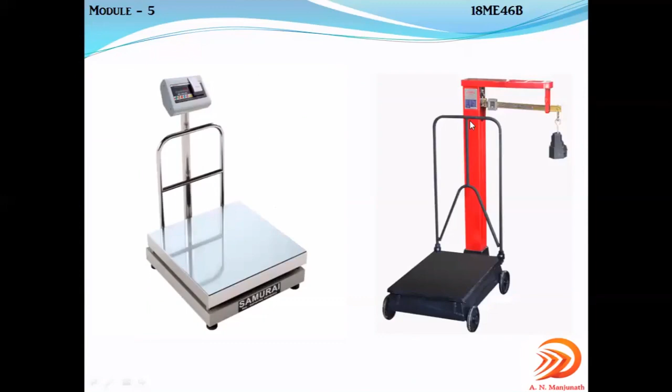Any idea about this platform balance? You have seen these things in grocery stores or shops where they weigh rice packets, 50 kg, 1 quintal packets, on this platform balance. This is what platform balance is, which you might have observed in the grocery stores. This is the digital one.

This is the platform on which the heavy weights or larger weight will be kept, and it will be shown. The earlier one, for the heavy weights, this will be the platform on which the weight will be kept. And this is the WS, shown in the figure, weight of the pan, weight of the poise.

Considering this as the platform balance, that image is given with respect to this. This is a digital one. This will be the more conventional one, where the mass will be kept over here. So this is the platform balance we are discussing now in this image. The resemblance will be there. This is the platform, and it can be moved, as shown here.

This platform balance or multiple lever system, when measurement of large weights are involved, this multiple lever system or platform system will be used.

A larger weight, represented by W, is measured in terms of two smaller weights. This large weight kept on the balance will be measured in terms of two smaller weights: one is WP, weight of the poise, and another is WS, weight of the pan. So the weight of this object, the larger weight, can be measured in terms of these two weights, weight of poise and weight of pan.

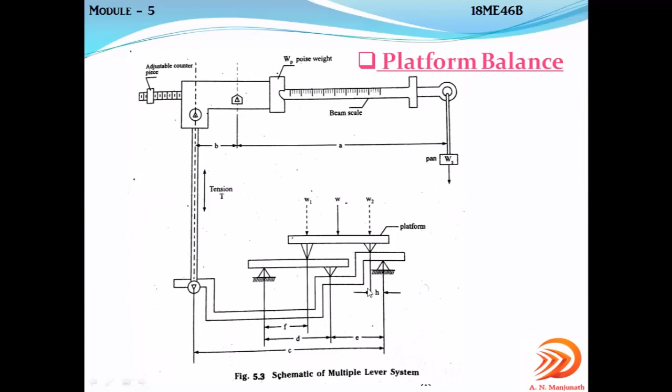With respect to the weight of the pan, Ws, this entire system is in the balance position. That is the assumption. With respect to this assumption, you can observe here, this is the tension. From this distance to this knife edge, this is C, this is D, E, F, multiple lever system. So this is the image we are discussing now.

The same image, multiple lever system. This multiple lever system, the same image I have taken over here. So for this we get the equation.

You can observe here, after this assumption that the W weight is being replaced by W1 and W2, and also this weight of the poise is at the zero. The unknown weight W is being applied. So entirely the balance, centrally, it is being balanced by the weight of the pan, Ws.

That is the assumption. Based on this assumption, you can observe here T into B, this is the tension. T into B, this distance with respect to this fulcrum, will be equal to Ws, the weight of the pan, into A, this arm distance. T into B is equal to Ws into A. That will be called equation 1.

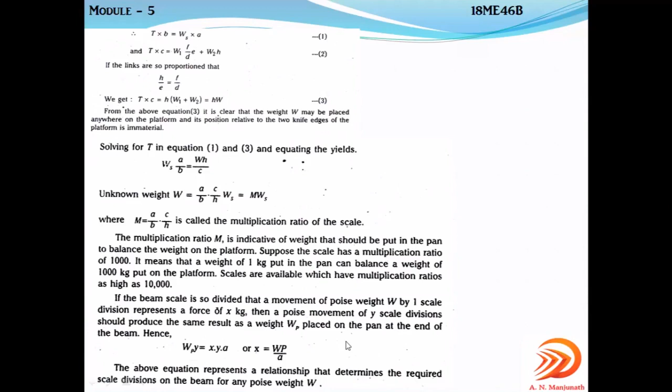This equation represents a relation that determines the required scale division on the beam for any poise weight W. For any poise weight W, this equation represents the relation which determines the required scale division on the beam. So this is what the platform balance is about.

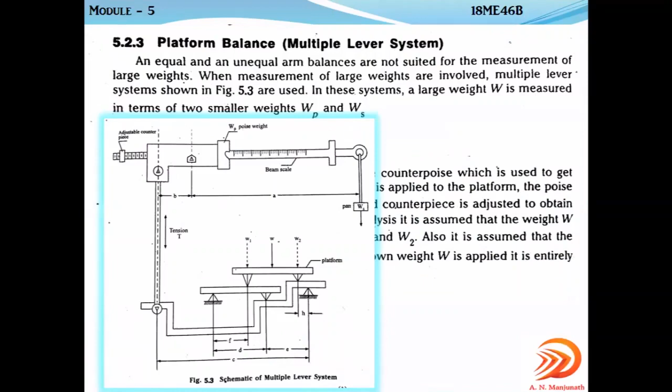Depending on the multiplication ratio, whether it is 1000 or 10,000, it will determine how much weight can be put into this W, S, which is weight of the pan. So basically there will be a pan here on which the weight will be added, so that the weight which is put, the larger weight which is put on the platform, will get balanced.

Whenever it gets balanced, then only you are able to get the reading, you are able to do the measurement. Similarly, like the analytical balance, whenever the pointer shows 0, when it gets balanced, then only you get the reading. Similarly here, whenever it gets balanced with respect to this smaller weight which is added in this WS weight of the pan, we get balanced and get the reading.

So this is another direct method of measuring the unknown forces. Unknown force means the W which is kept on the platform by using the gravitational force of standard mass. So it is also called a multiple lever system.

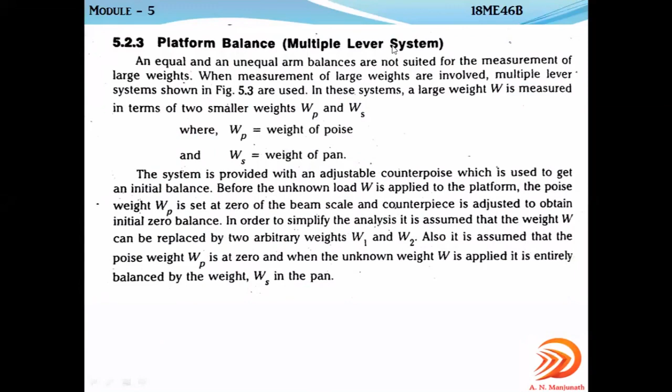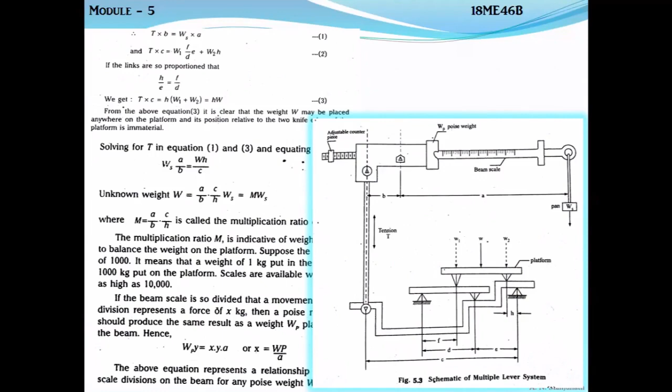So this is about the third one, direct method of measuring the unknown forces. So next topic will be the indirect method. Till now what we discussed is the direct method of measuring the unknown forces. Next will be the indirect method of measuring the unknown forces.

So this is what the indirect method is. Indirect method means it involves the measurement of the effect of the force on a body. Indirect method represents the measurement of the effect of force on the body.

Here are the examples we discussed in the last class: the measurement of acceleration. If this is the object which needs to measure the acceleration of the body of known mass which is subjected to this force, because of this force being applied, you are measuring the effect of that force in terms of acceleration. This is indirect method, or this deformation, the resultant effect because of the force being applied.

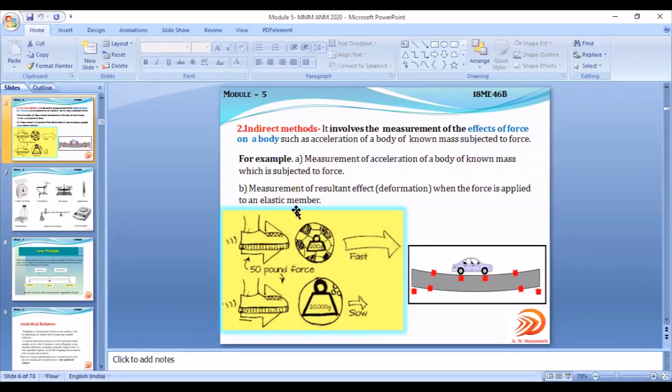Here also, because of the force being applied, you are measuring the effect of it. So that is what indirect method means. Now we are going to discuss this indirect method, how to measure the effect of forces on the body through the indirect method. So this is what the indirect method is.

In this indirect method of measuring the unknown forces, we'll discuss the proving ring. This is one of the devices or measuring instruments which is used for measuring force. It is called a proving ring. It is a device.

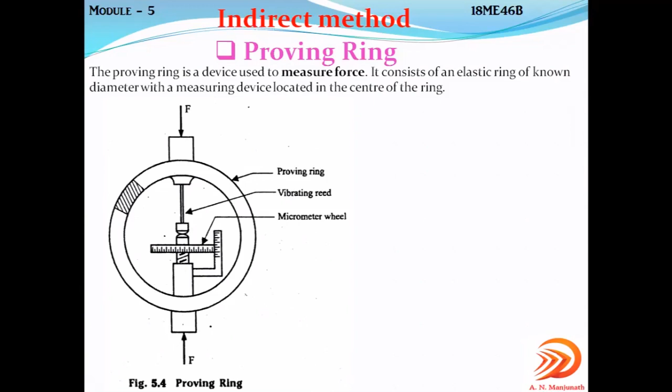Whenever the force is being applied, this elastic ring tends to deform, and that deformation can be measured by using the micrometer wheel, which is kept or placed in the center. So this proving ring, which is circular, having a rectangular cross section, is subjected to both tensile or compressive force. Based on the requirement, it can be used for tensile also, compressive force also. So this is what the proving ring looks like, circular ring with rectangular cross section.

So this is the micrometer wheel. It consists of this vibrating reed which is connected to this micrometer wheel. This micrometer wheel tends to rotate whenever the force is being applied, this elastic member, the circular ring, tends to deform.

But the deformation will not be that much because it is a steel ring material, you can observe. So whatever force is being applied will be transmitted to this vibrating reed, thereby to the micrometer wheel. There will be a scale which will make it possible for the operator to take the reading, what is the force which is being applied, because it is a device which is used to measure the force which is acting onto this elastic member.

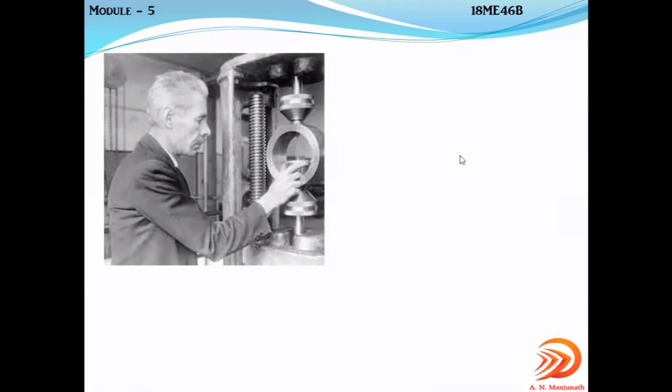You can observe on the proving ring these junctions at which the load can be applied. You can observe here this has a thread. If the proving ring has the threaded part at the top and bottom, it is considered to be used for measurement of tensile forces, because one more rod will be available, the connecting device, which will be threaded onto this proving ring. Since it has the threads, whenever it is threaded we can apply the tensile force, that is the pull force.

In order to apply the pull force, if it is compression, there's no need for the threading part at this point - simply mount it and apply the force. If tensile force needs to be applied, it has to hold this ring, then pull it. For the holding purpose, at these junction points there will be threading. If the ring has threads, it is used for measurement of tensile forces - it will be wound onto the threading, then applied for the tensile force, the pull force.

It can be a thin or thick proving ring. This is how the reading can be taken from the proving ring. And here you can observe it has threads here, so if it has the thread, it is basically used to apply the tensile force, the pull force.

The proving ring can be designed to measure either compression or tension forces. Some proving rings are available for both. The basic operation of the proving ring in tension is the same as in compression, to apply the force and measure the unknown forces applied onto this proving ring. But the variation is that the tension proving ring will have threaded bosses here, and are supplied with the rod for this, so that it is facilitated for the pull to happen, which will be screwed onto these bosses. Here is one, here is another.

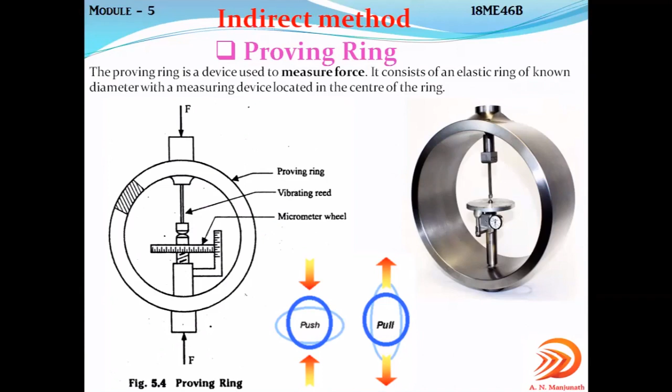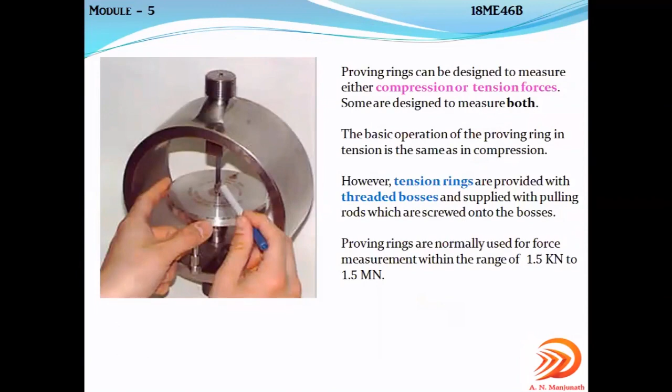So the next topic will be torque. We will discuss about this particular torque and how to measure it.

So all of you know this torque. Basically, torque is the force which is being applied for the twisting motion by the length.

Torque is basically a moment of the force. It is a rotational force that tends to rotate an object. So force by length is what torque is.

The force, in addition to its effect along its line of action, may exert a turning effort relative to any axis other than those of the intersecting line of action. Here you can observe that such a turning effect, which the force will generate, is called torque, or it is also called a couple, as shown in this figure.

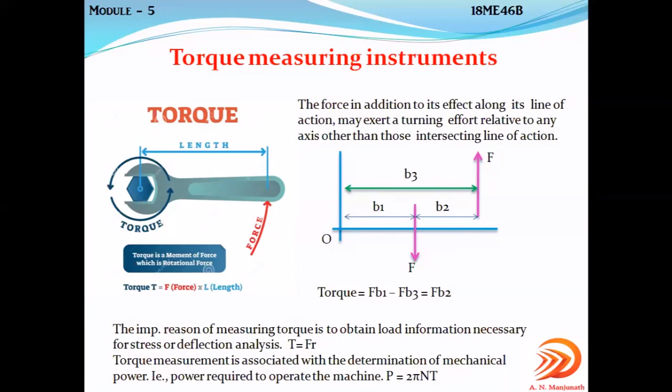Before going into the measurement of torque, this is an introduction. If you take automobile industries, for a car or automobile, in order to test whether a particular automobile being manufactured is good enough and has quality, different tests are conducted.

Usually the parameter where the maximum tests are conducted is testing the performance, testing the responsiveness to acceleration, that is measuring the performance of the automobile, for example 0 to 100 in 5 seconds.

Other measurements include emission or fuel economy, durability, how much noise it can generate, how much vibration it can generate. All these measurements - performance, responsiveness to acceleration, fuel economy, durability, noise, vibration - the parameter which affects these measurements is basically the engine.

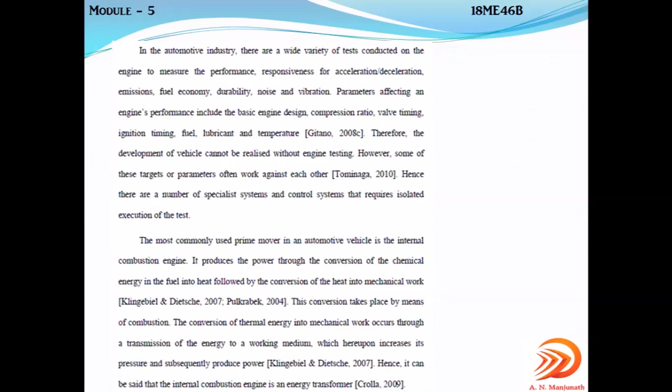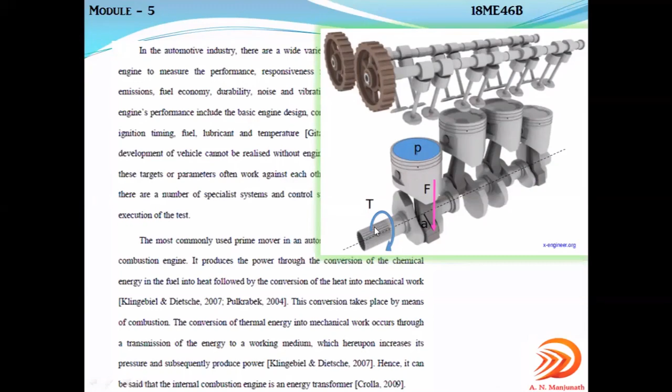The ability of an IC engine to do work is basically measured by a quantity which is known as torque. You can observe in this image, right? The ability of the IC engine to do work is measured by a quantity known as torque.

The torque produced by the IC engine is measured by a device known as a dynamometer. So basically, the dynamometer is a device which measures the torque produced by the IC engine, and torque is a quantity which measures the ability of the IC engine to generate power. The ability of the IC engine to do work measures a quantity called torque, and in order to measure it, a device called dynamometer is used.

Basically, the dynamometer is a device which resists the torque produced by the engine. It is connected to the engines or electric motors and resists the movement of the engine. There is a shaft to which it is coupled, and thereby it measures the torque which the engine or the electric motor can generate.

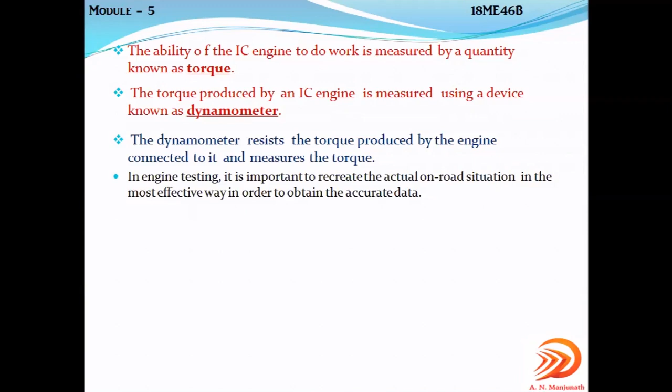Not only engines but also electric motors can be coupled with the dynamometer to measure the torque. Torque represents the ability of the motor or engine to do work, and to measure that, this particular device is used. It is called a dynamometer.

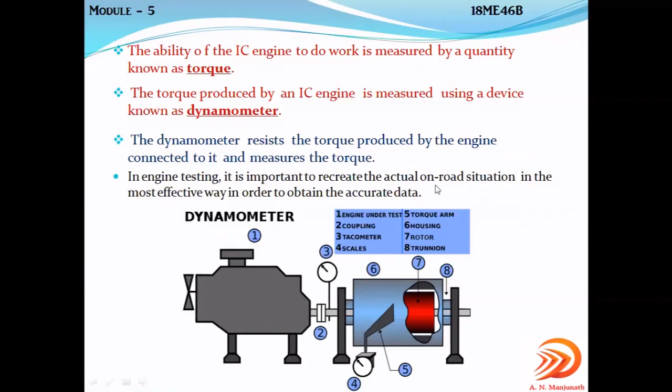This measurement of the power generated is done with the help of the dynamometer. It is considered as a brake, for which it is not strictly a measuring device—it indicates the magnitude of the force required in an attempt to stop the engine, to simulate or recreate that on-road situation by resisting it. It indicates the magnitude of the force required in an attempt to stop the engine. That is what the dynamometer is about.

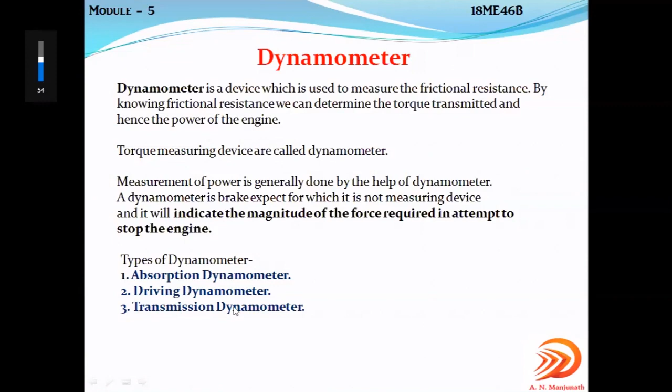It is a device which is basically used to measure the torque, and there are three types of dynamometers. You can observe here: absorption dynamometer, driving dynamometer, and transmission dynamometer. These are the three types.